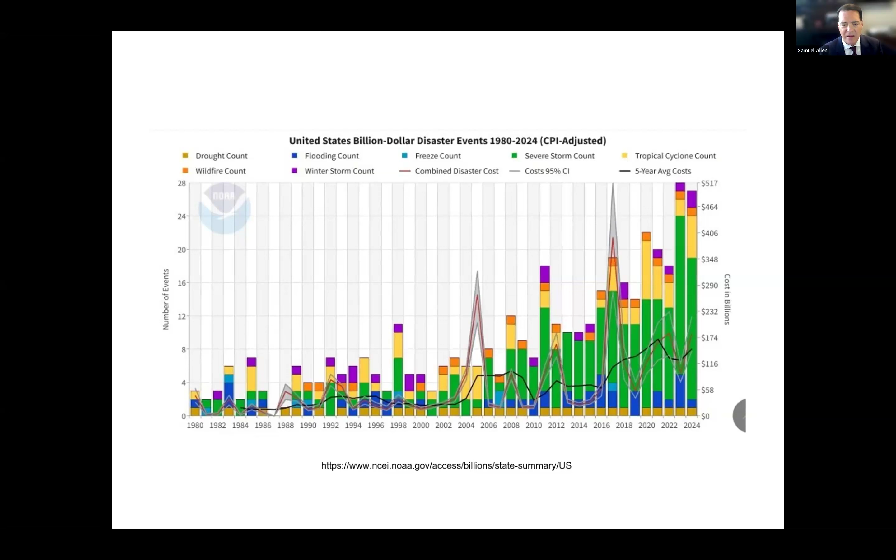What you're seeing here is a chart from the National Oceanic and Atmospheric Administration. It shows us the cost of recovery, adjusted for the Consumer Price Index. The cost is increasing because the frequency of natural emergencies is increasing, such as floods and fires, superstorms, droughts. Our weather is changing, and its subsequent stress on our infrastructure is increasing.

This is happening while the global trend towards replacing fossil fuel cars with electric cars is intensifying our thirst for needed metals and driving a growing mining industry. Your cell phones, your cars, we're electrifying our energy sources, and this requires a lot of metals. Electric cars result in a heavier vehicle that our pavement structures, as they exist today, were never really designed for, challenging our transportation infrastructure.

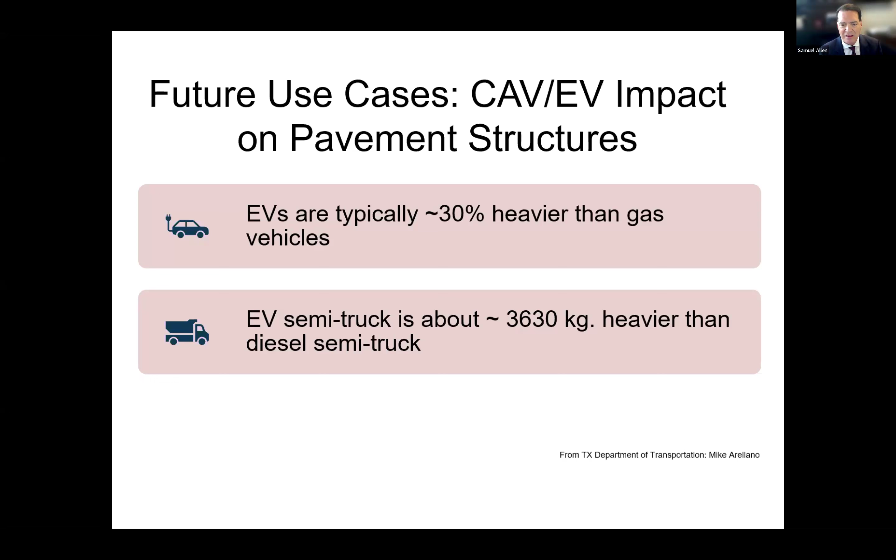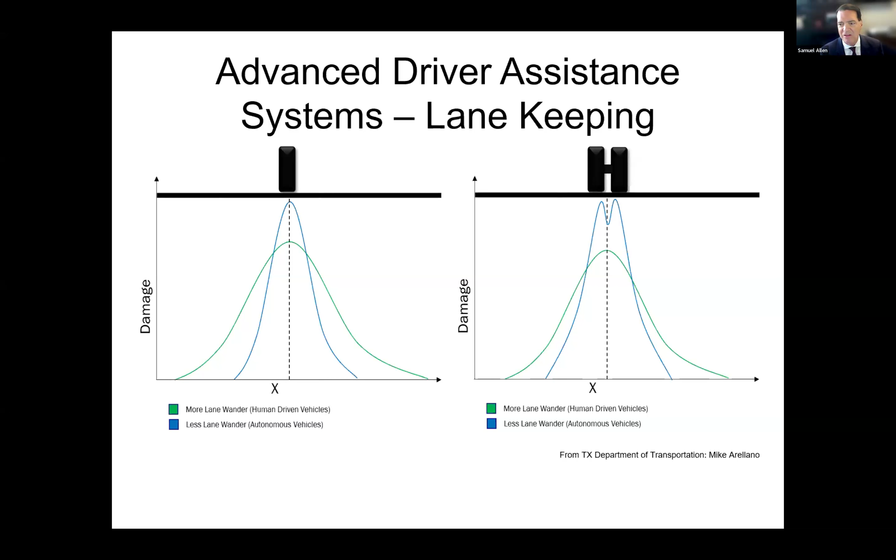I don't know about your town, but in my home here in Austin, Texas, there's been a significant increase in Waymo cars, the driverless cars. And according to Texas transportation officials, the next step in this linear process is to have automated transport lanes, with much less lane wander, called lane keeping. And this also increases localized stresses on road structures, roads that indeed were not really designed for this.

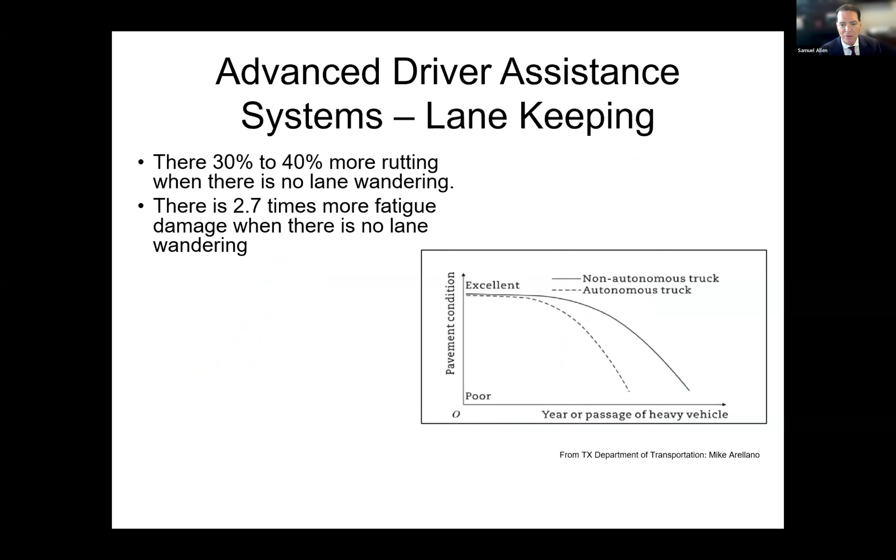So there's 30 to 40% more rutting associated with lane keeping and close to 3 times more fatigue failure or cracking. And cracking is not good, right? This leads to water intrusion and related degradation mechanisms. This is an environment of underfunded maintenance, as reported by TRIP. You see here the recent report card on United States infrastructure roads.

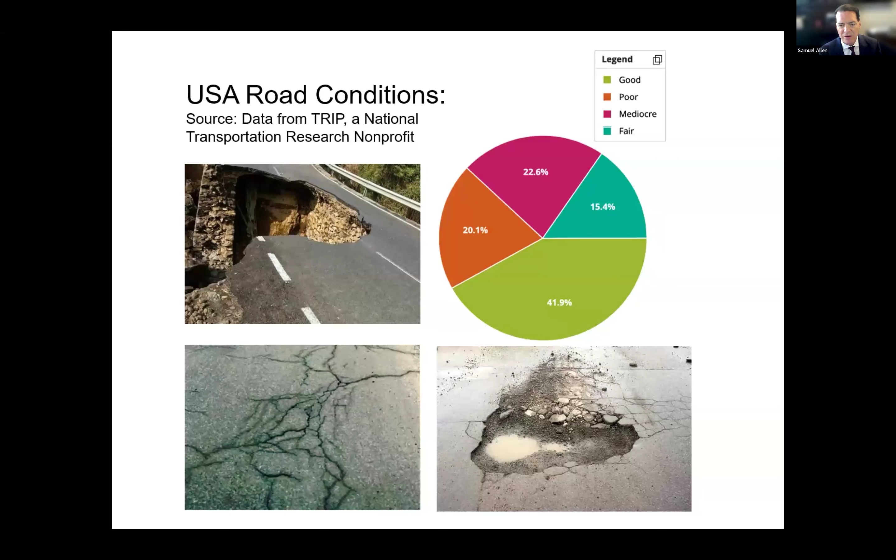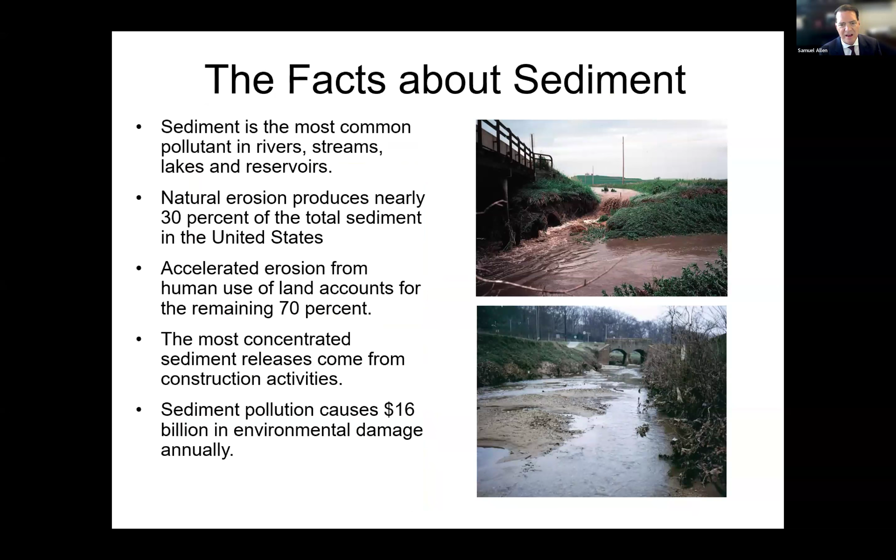I would also add that an application that's of very impressive scale is sediment pollution, and this is worldwide. This is a global issue. We, human activity, drive this pollution, and the damage caused is very expensive to our society, as you see here. The effect of erosion to waterways is also harmful, driven largely by warming water resources, the choking off of dissolved oxygen supply, the increased turbidity. These changes fundamentally challenge our ecosystems, including accelerated loss of wetlands.

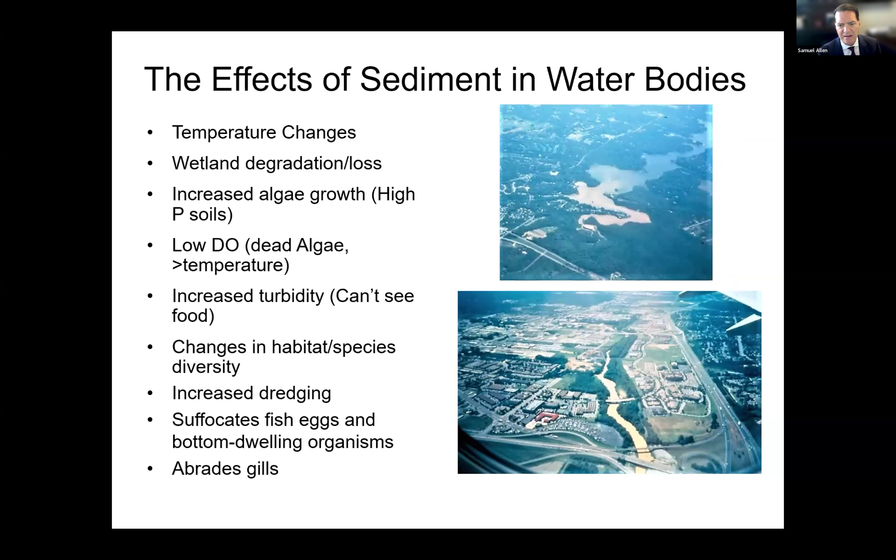So we need a different way forward. From an engineering perspective, this means an added design criteria. As my good friend Dr. Jorge Zornberg has expressed, most engineering students early in their collegiate career learn about materials and learn about the performance of those materials. They graduate, they go out into the commercial world, they quickly learn that economics governs decisions on firms, decisions on materials. But now we're starting to figure out that there's a very strong, urgent need for the requirements for sustainability and indeed resilience.

The United Nations, of course, most of you have seen this, has set the stage for humankind to target sustainability with these 17 goals, ranging from food security to an end of poverty, but also a response to climate change and the preservation of clean environments. But sustainability and resilience means different things to different people. There's often in design a push-pull relationship between economic concerns and equity, human equity or social justice, engineering efficiencies, and the lowest carbon footprint, right?

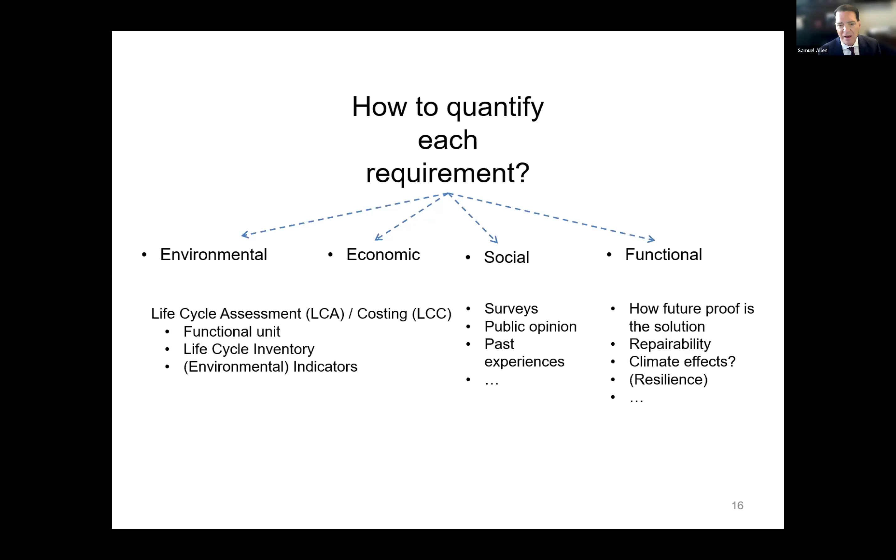Geotechnical and civil and environmental geologic engineers are starting to navigate these kinds of push-pull issues in their design. Indeed, a given structure, geotechnical structure, is burdened with requirements informed by or affected by multiple considerations: carbon counting, economic cost, public benefit, resilience or future proofing of a structure. Ivan Damians, the current chair of the IGS Technical Committee on Reinforcement, compared three wall designs: a gravity wall, a cantilever wall, a geosynthetic reinforced wall.

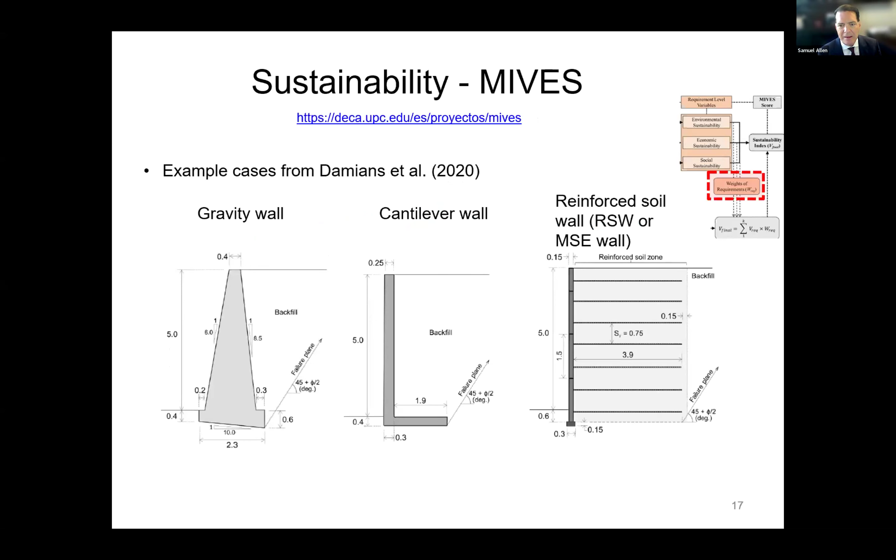He used MIVES, which is Spanish, out of Spain, an integrated value model for sustainable assessment, having a multi-criteria decision-making methodology for evaluating sustainability. And what's interesting about that is when he plugged in all the data and played with the weighting of all these sustainability related considerations, not just carbon counting, then the answer changed, right? The best option changed, showing that true sustainability assessments require a holistic consideration of several parameters.

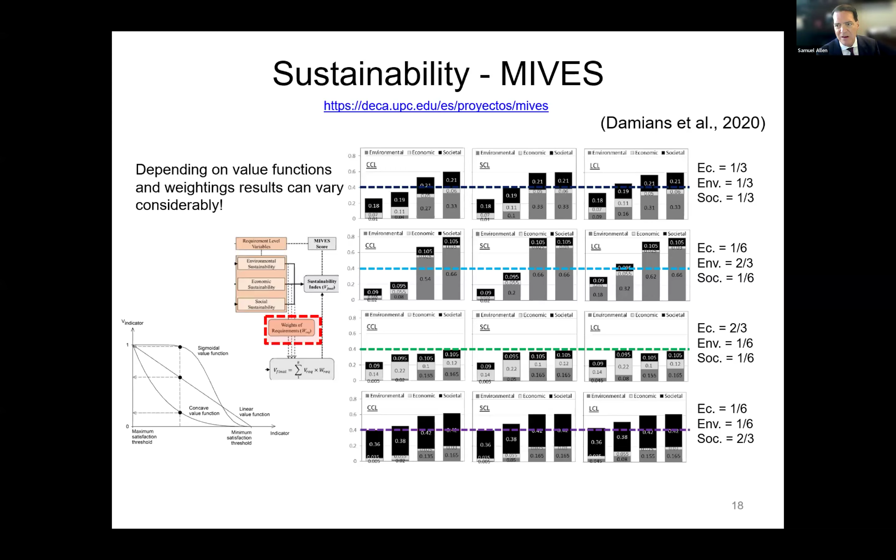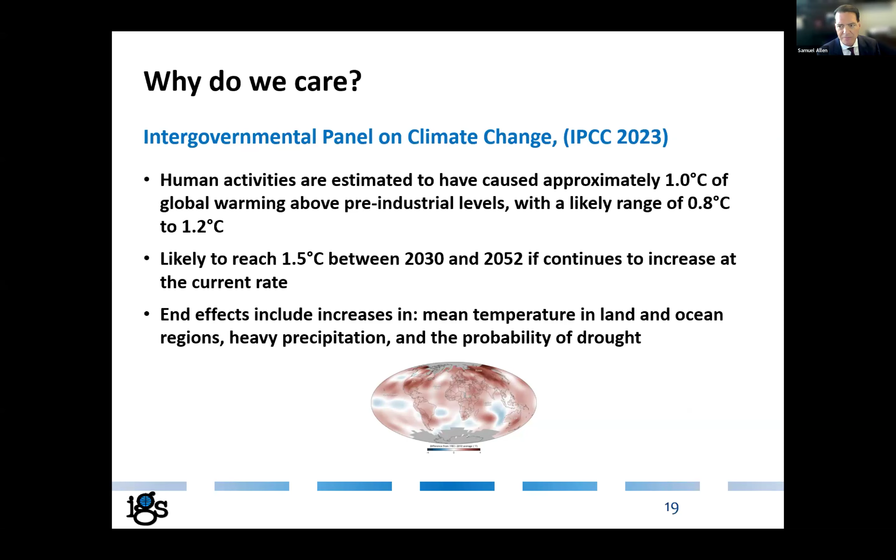So it's clear now that sustainable and resilient design are important as we experience warming of the atmosphere as well as water resources, the redefinition of extreme weather-related events to intense droughts, flood storms. And we're inviting infrastructure development industries to embrace more resilient and sustainable designs using more resilient and sustainable materials. And the other thing I'd point out is that it's in this planning and design phase of the development process that we have the greatest impact on making a change in our infrastructure development.

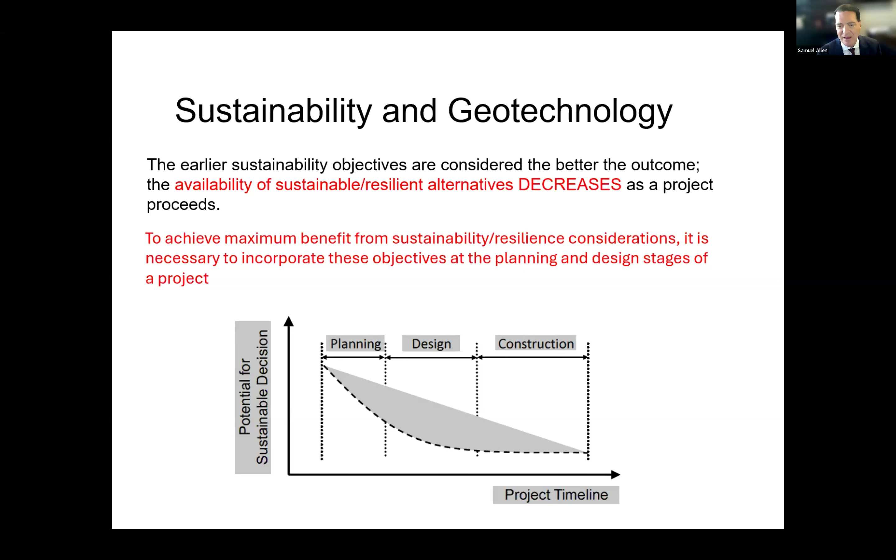For example, if I'm building a building foundation project, there can be a choice of foundation types at the planning stage, while the choice is limited to those materials during the design phase. And in the execution stage, the choice is very limited to just the equipment used to build my project. So it's really important that we maximize the benefit of these changes in our design to articulate sustainability, move towards sustainable and resilient considerations early in the planning and design phases.

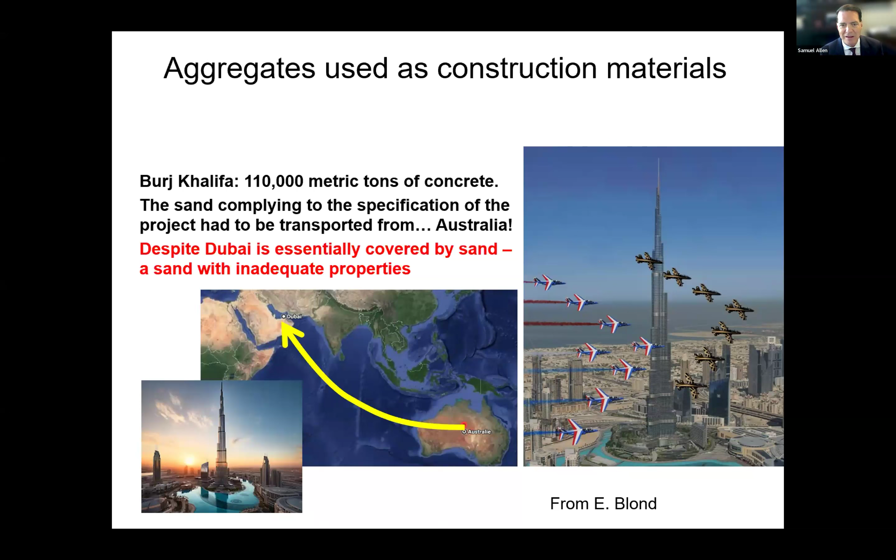I'd also add that, if we're thinking about design materials, construction materials, what about aggregates versus geosynthetics? Aggregates of adequate quality for construction are among the less renewable resources on Earth. Eric Blond, my good friend, pointed out that just in the last few years, this wonderful building in Dubai, this tall, record-setting building, the Burj Khalifa, 110,000 metric tons of concrete, but it needed a component with a very strong specification for the sand that was not available in a country covered with sand. And so all of this sand was transported and imported from Australia. So this is an issue, right?

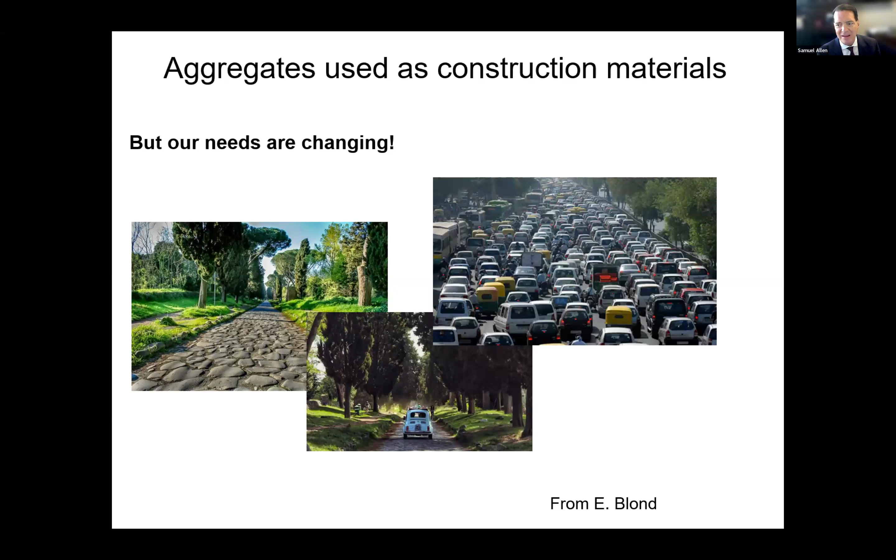Sand and gravel, they're very durable when they're not contaminated, certainly. Aggregates and sands are known commodities. We study them in school. We have designed with them for centuries, but indeed our needs are changing as we grow in population and in traffic. So again, in my own town of Austin, Texas, when I moved here to go to college in the early 80s, it's been nothing but a solid boom. This is Texas. Economy's on fire.

People are moving from all over the United States into the triangle that's defined by Dallas, Texas, San Antonio, and Houston. All those people bring their vehicles, and all of the infrastructure that we have is inevitably going to not be enough, right? And while our needs increase, the availability of aggregates, competent aggregates to build roadways, remains the same. It's not increasing.

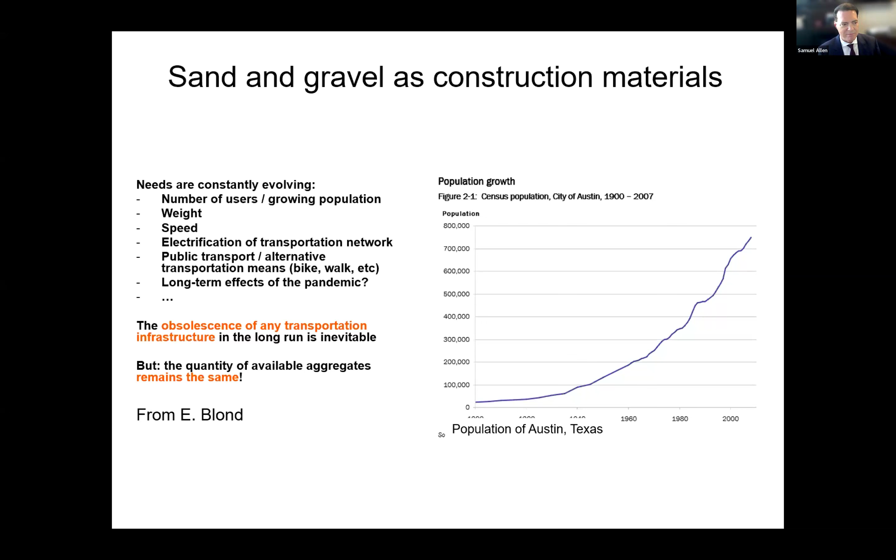So, see if I can move on here. Seem to be stuck. There we go. Okay, so

Let's talk a little bit about geosynthetics.

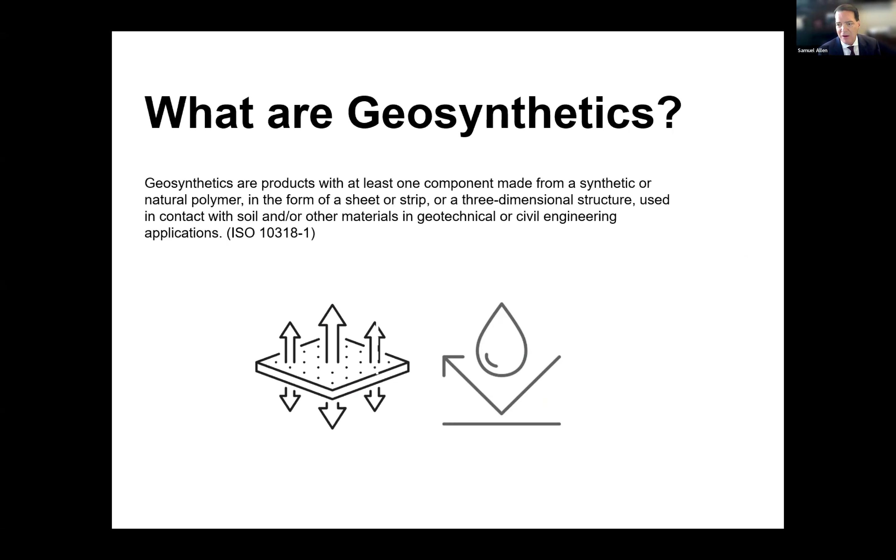For the not initiated, what we're talking about here is materials that are artificial products that are added to Earth to fulfill a function, right? In whichever function they're used, the geosynthetics will be either permeable or impermeable, allowing for or preventing the flow of liquid or gas in either direction.

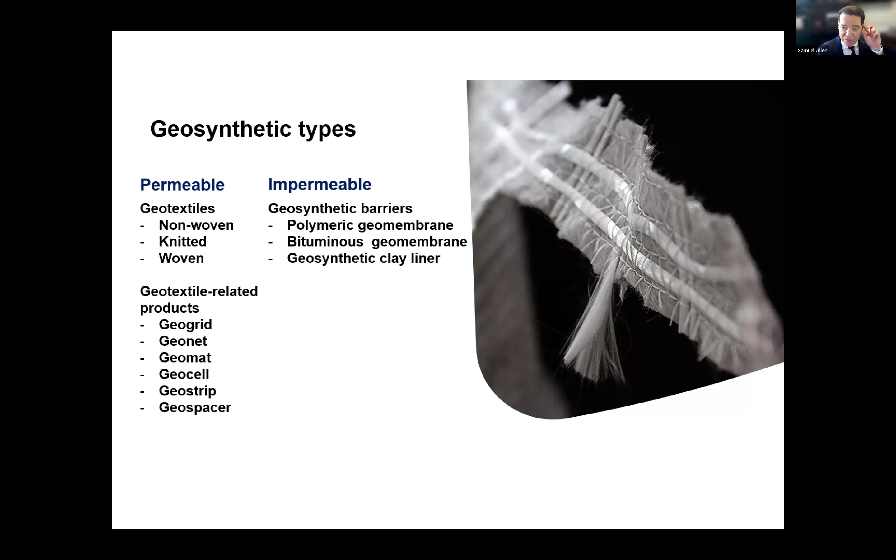In general, geosynthetics are in the form of textiles, and when they're in the form of textiles, they're permeable. They can be woven, as in the picture here, or non-woven or knitted. They're used with a range of related products listed here. They're really the workhorse of geosynthetics, with many, many different functions. Impermeable geosynthetics typically perform a barrier function and are often in the form of a membrane.

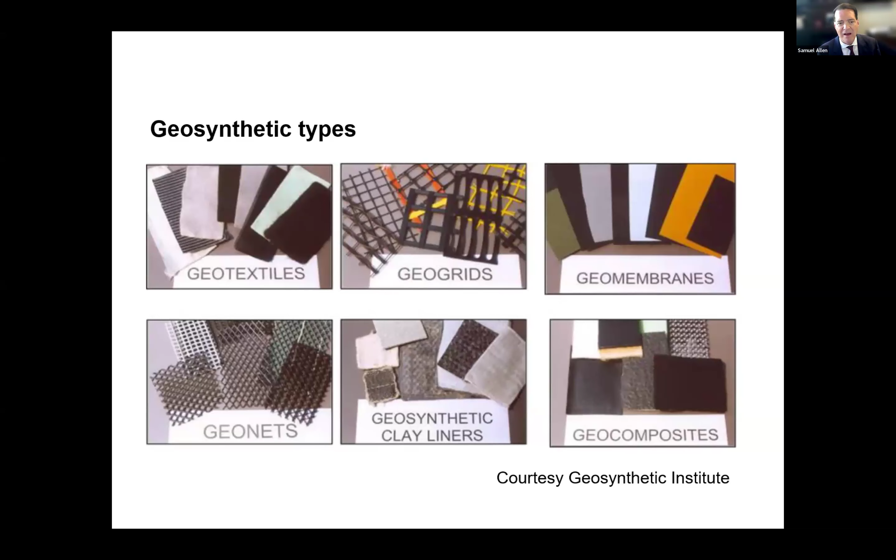Here you see some pictures of small samples of geosynthetics. Most of the main types of geosynthetics; what's probably not shown here is geofoam, polystyrene blocks and drainage noodles. But you see here geotextiles, geogrids for reinforcement, stabilization, geomembrane barriers, geosynthetic clay liner barriers, geonets, and composites, of course, when two geosynthetics are joined together.

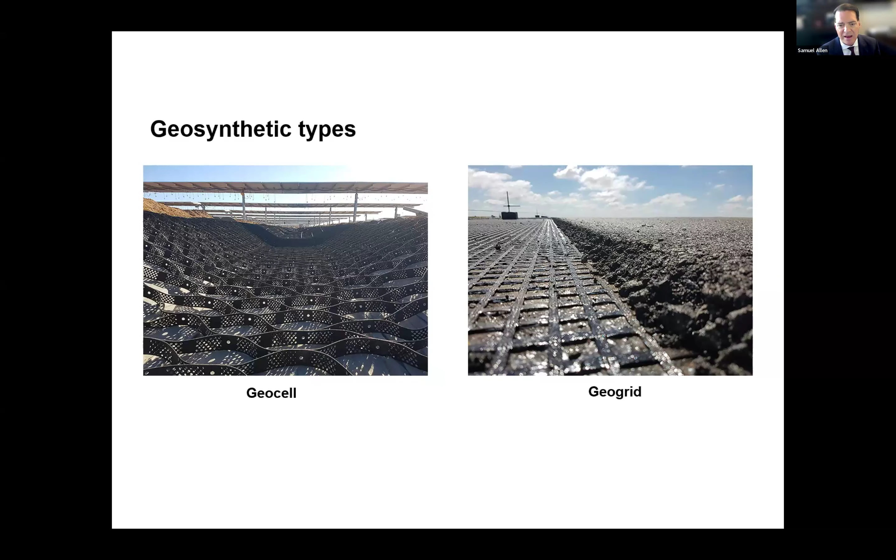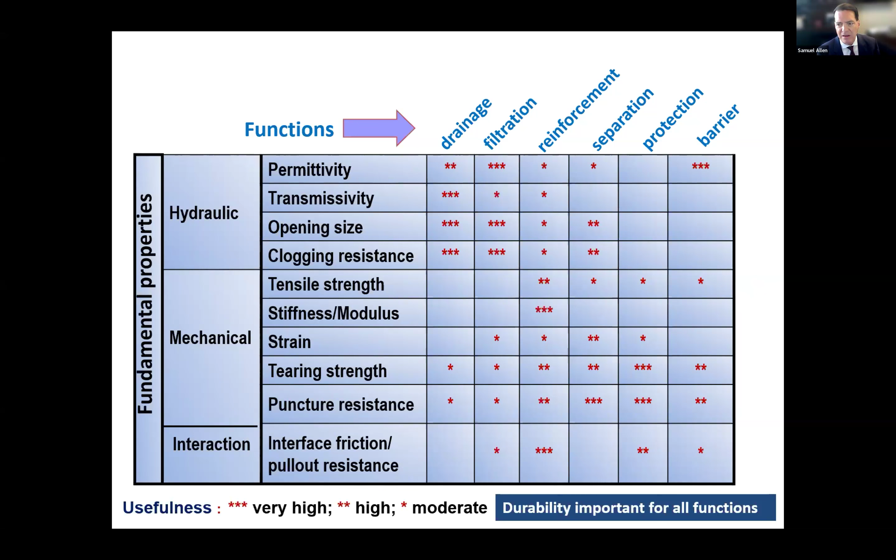I'll also add that as manufactured products, they differ from soils and aggregates in that they are highly controlled, produced under maximized manufacturing conditions, highly engineered formulations. They're characterized by a high degree of consistency, serving a more stabilized construction, more certified construction, if you will.

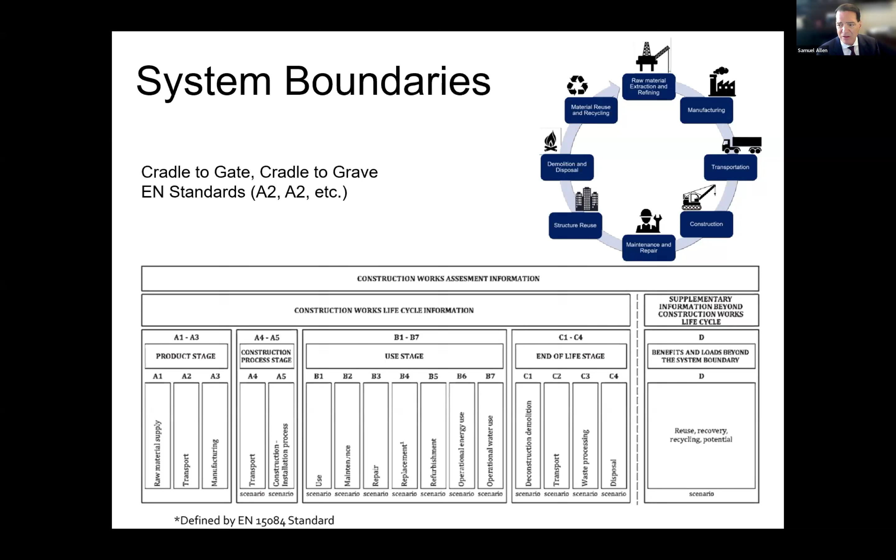You see here a table with columns assigned to various stages of construction work, from raw material production to manufacturing to shipping to installation. We see end of life, the full life cycle of this product. Any product for that matter.

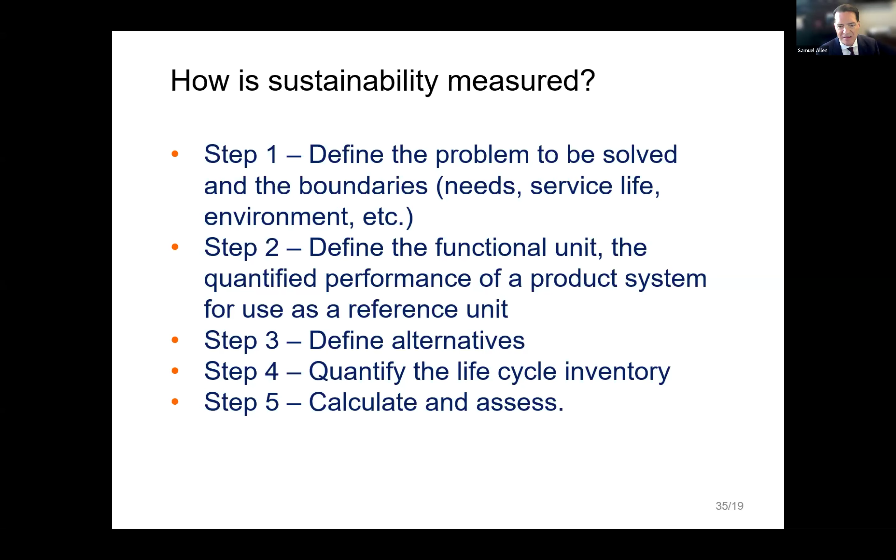So here, a functional unit is that little unit that I'm evaluating, comparing different design approaches with. A functional unit is a component or a service with a clearly defined role within a larger system. So it represents a quantified performance of that system, and the definition depends on the context of the life cycle assessment. It is a reference unit for comparing products by their function, right? We need enough detail with a functional unit to provide a valid comparison with other material alternatives.

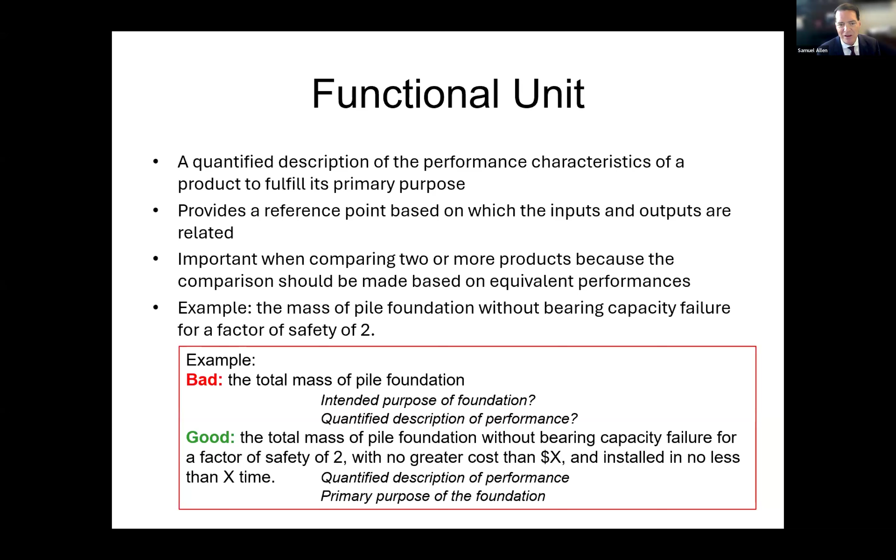Like you see here, I could plan on a pile foundation without a bearing capacity failure for a factor of safety of 2, no greater cost than X USD, and installed in no less than X time, right? So now I can start looking at alternatives to provide that function, that service in my design.

Now, note that the language of carbon counting is always through the use of carbon equivalents. What is this? The CO2 equivalent is a unit that standardizes the climate impact of different greenhouse gases by comparing their warming potential to that of carbon dioxide, sort of the common denominator.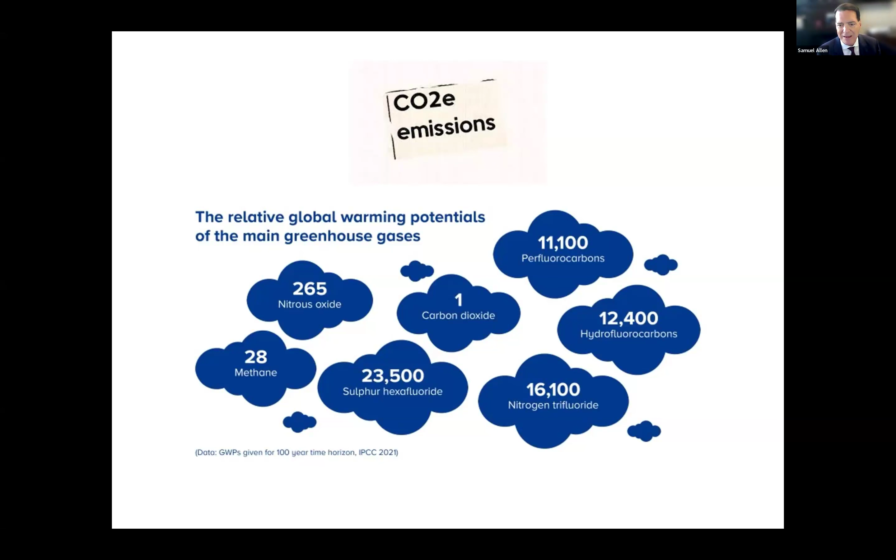To calculate it, you multiply the mass of the specific greenhouse gas by its global warming potential relative to CO2. And this provides a single comparable metric for the total climate impact of all greenhouse gas emissions. Very important tool. So let's just play with this.

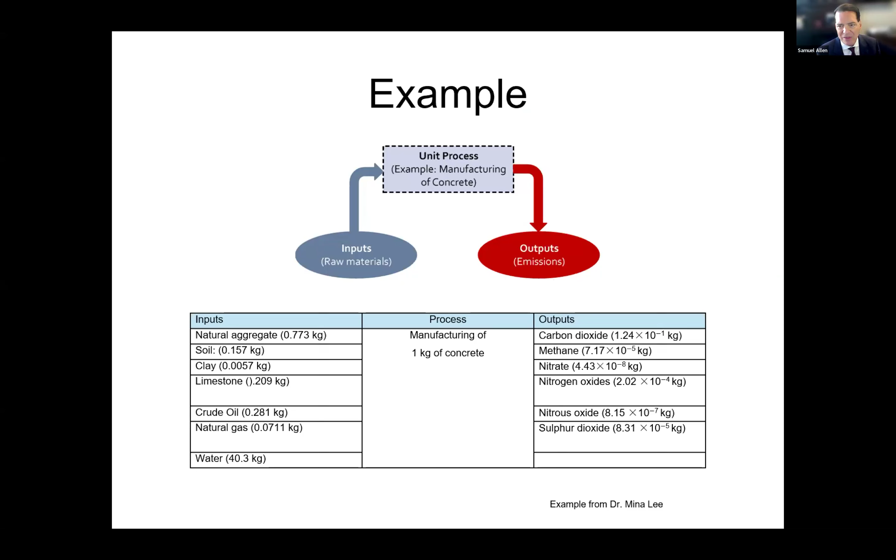Let's take 1 kilogram of concrete, and I know all the components of my concrete, and consider the inputs and then the resulting emission outputs, right? And if I get that, then I can multiply the emission factor in a carbon equivalent unit, a CO2e unit, times the mass of the concrete shown here for carbon dioxide. So that 1200 kilograms will generate 149 kilograms of CO2.

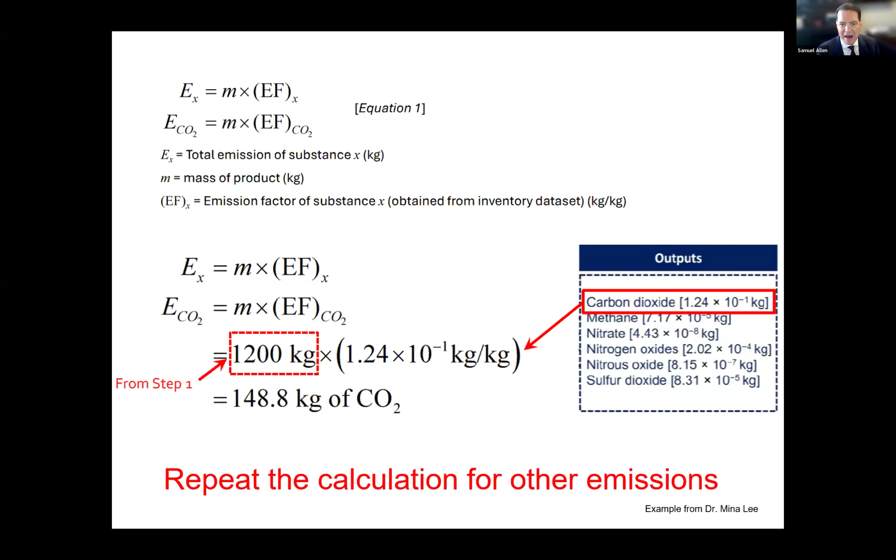And then I would repeat that calculation for other emissions. So this is how I compare these different materials. But that's material carbon counting. What about the shipping of that material to a site? This is a function of the type of road and the distance I'm traveling. The paved road is not the same as the unpaved road, right? So these go into our calculations.

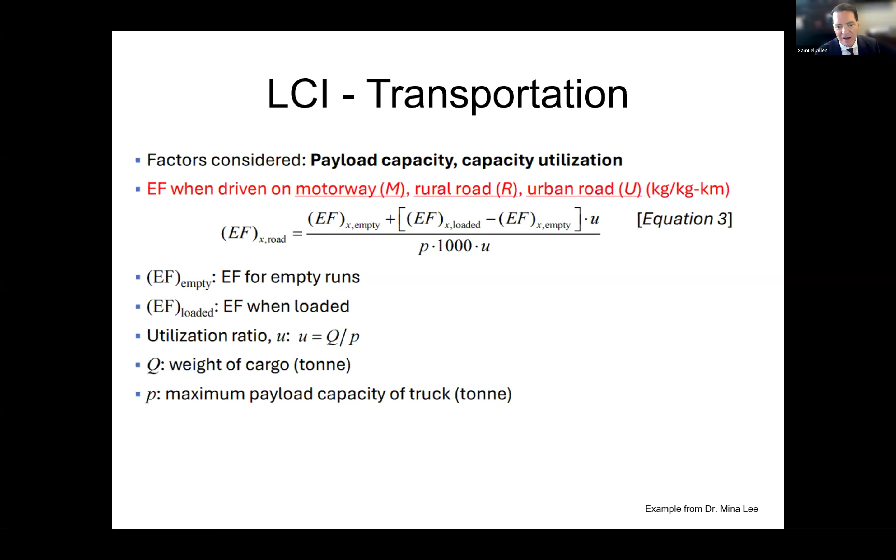Also considered is how full my delivery truck is, its fuel efficiency, its weight, a lightweight truck or a heavy truck. Now, a lot of this carbon counting and shipping data can come from what we call environmental product declarations. These are produced by equipment manufacturers, material manufacturers, geosynthetic manufacturers, and then they're published by these same companies. So a lot of this information comes from them.

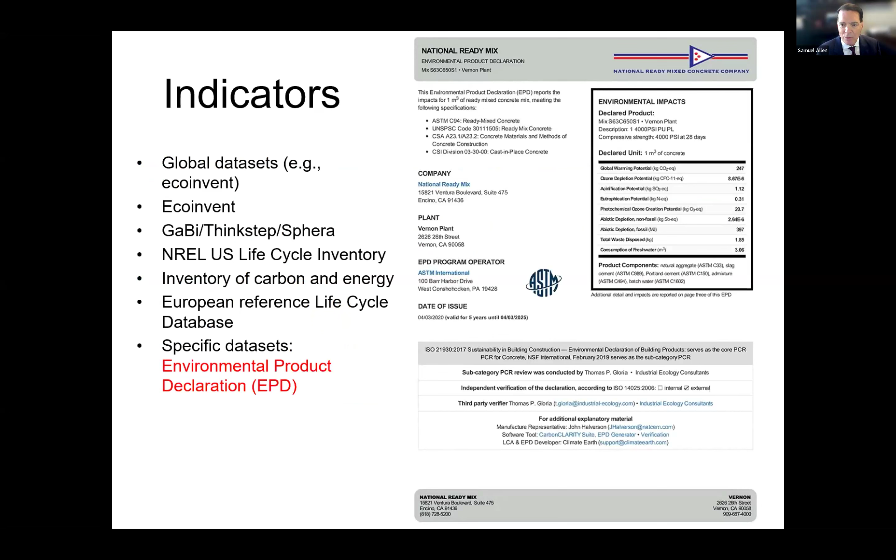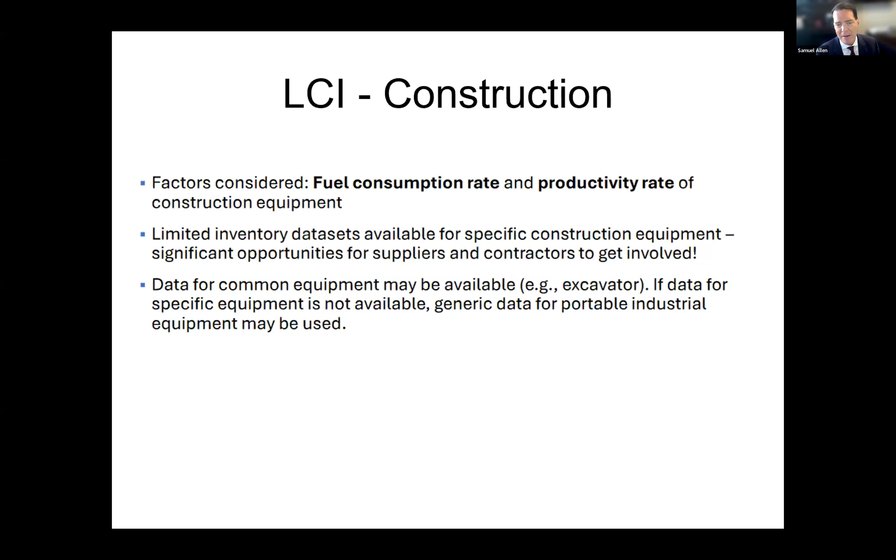What we're still missing in our industry is the life cycle inventory associated with construction. It's leaning into equipment published EPDs, but there's so much active here. The carbon footprint is related to fuel consumption and efficiency of installation and construction. That efficiency we need from some of our geosynthetic installers, and really a lot of our contracting community. Factored in are the power of the engine, loading factors, fuel density and efficiencies. All of these things go into considering the carbon footprint of construction.

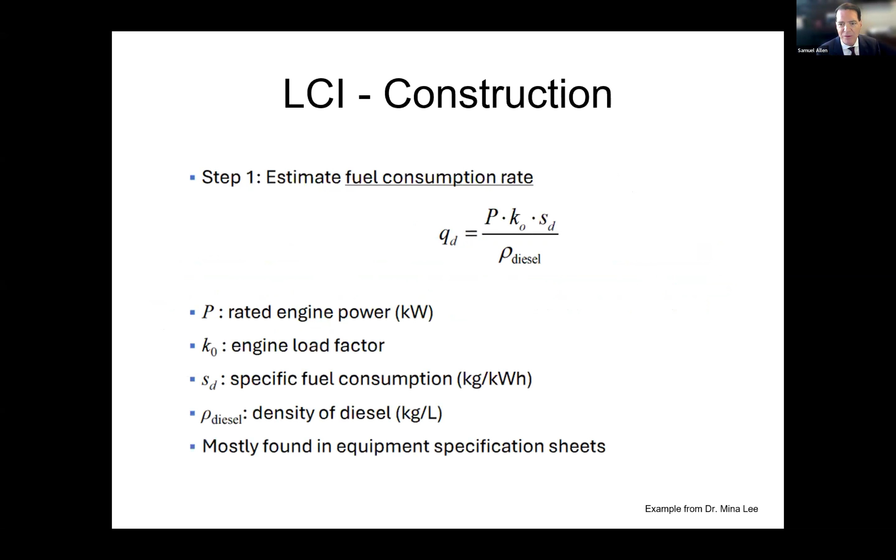And then we consider the operation time, which depends on workloads and productivity rates; something called the bucket fill capacity factor comes into play. How many trips do I have to make between the stockpile of material and the compacted fill location or the installation location? This is all to point out that these are not just numbers, but significant calculations that impact the environmental carbon footprint application.

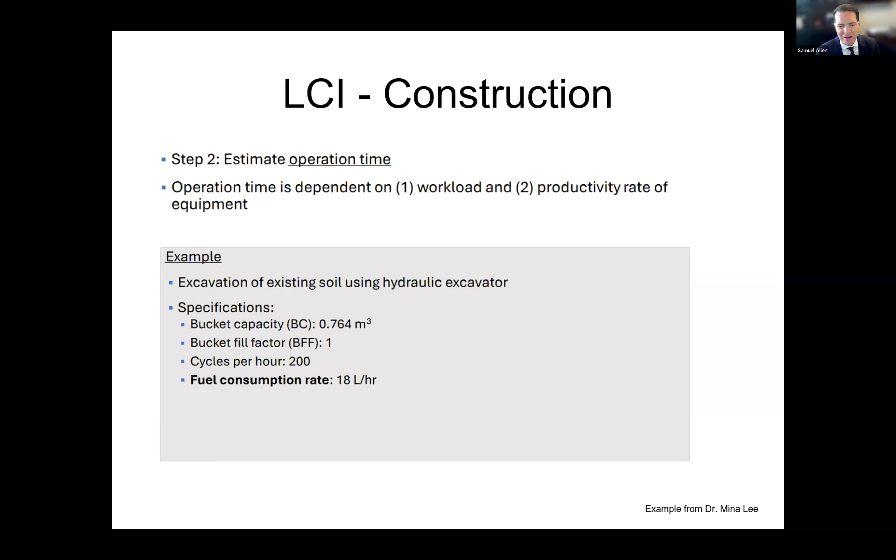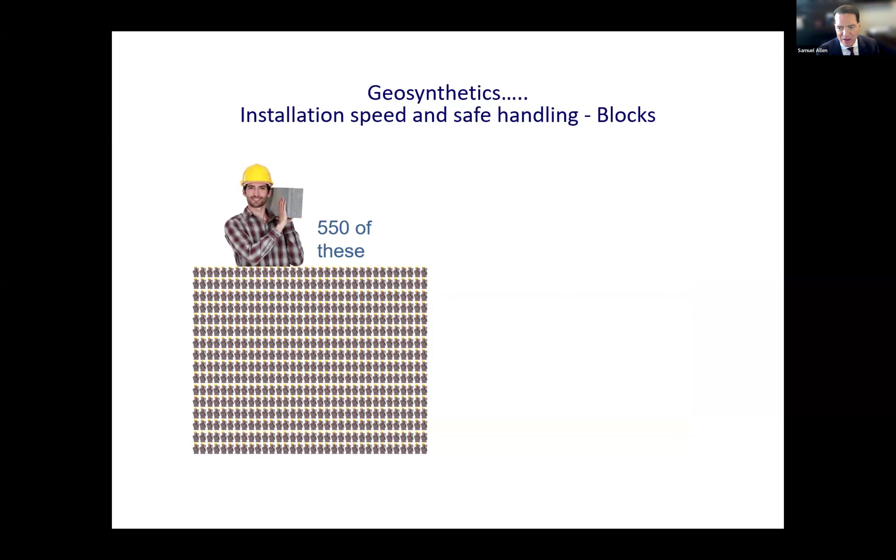And why is the geosynthetics industry so keenly aware of this? Because the use of geosynthetics is a significant solution to lowering the carbon footprint of transportation, shipping, and installation. Not just an economic benefit, but a sustainability benefit as well. So when we can replace a lot of these drainage blocks with a roll of geocomposite drain, that's a big contribution.

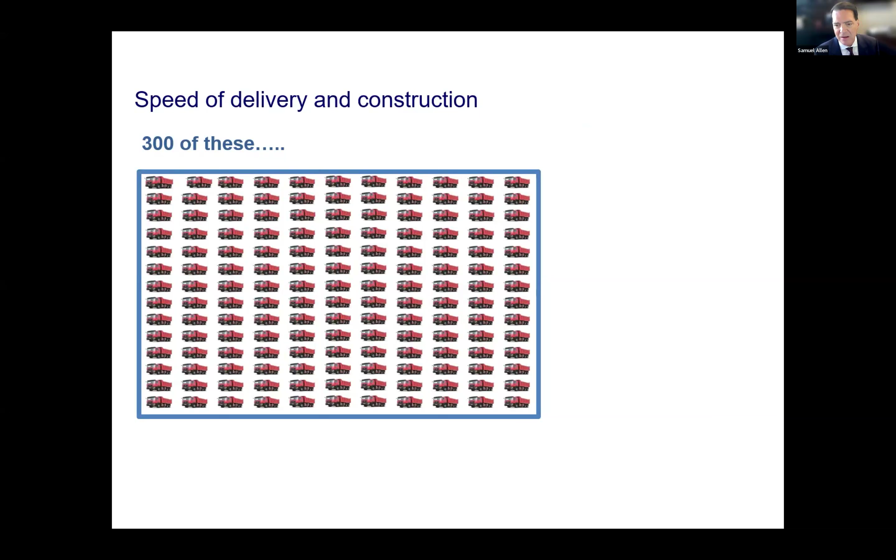When we eliminate these significant numbers of transports, ships or trucks at lighter loads, then we're achieving numerous sustainability benefits, including less tire wear, less fuel used, less time invested, all with a lower carbon footprint construction material. So again, I show you this to draw back the curtain on the process and calculations of sustainability. Meanwhile, there are many online platforms and databases to assist you in finding carbon footprints associated with construction materials.

The challenge with many of these platforms, though, is that most of them do not include geosynthetics information. And for that reason, the International Geosynthetics Society partnered with One-Click Life Cycle Analysis, or One-Click LCA. What we did was bring geosynthetic materials and their applications in different components, different platforms, to be included on their program for comparing different construction materials.

OneClick spends most of its time going around the planet harvesting these environmental product declarations and their associated material carbon scores. They are a very important layer in sustainability education and resource development associated with sustainability and resilience. They provide an application template that was developed by our team at the IGS. They assist geosynthetic manufacturers with EPD development and publishing. They are carbon counting experts at LCA.

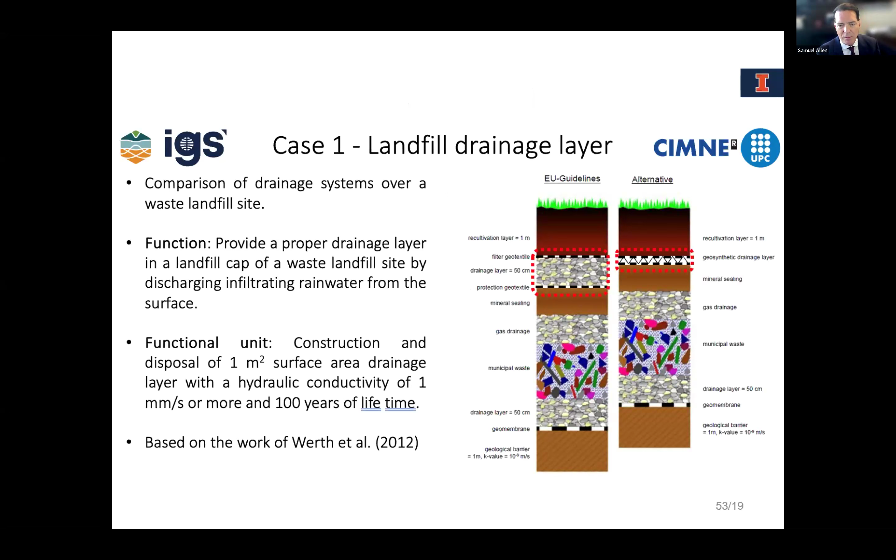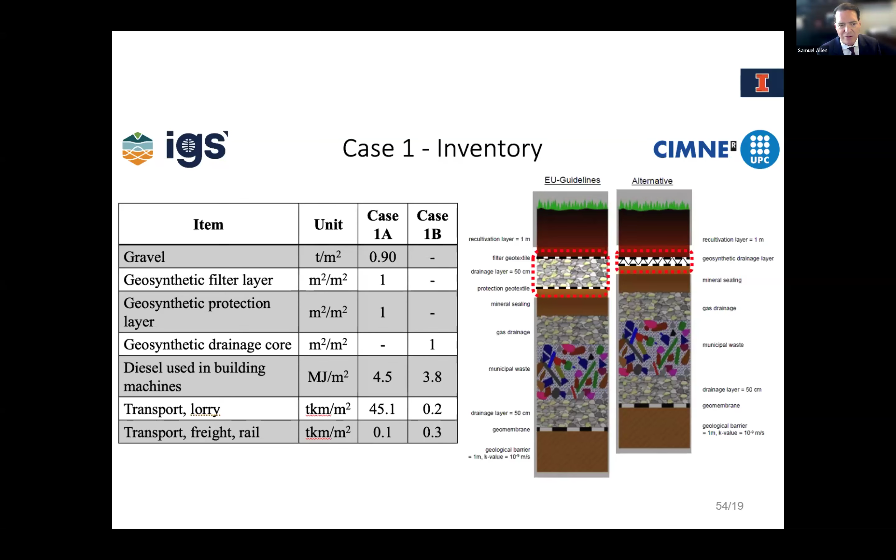So let's look at a couple of comparisons here. We're comparing a functional unit of 1 square meter of a landfill cap drainage layer, built with a drainage aggregate or with a geocomposite drain, for a service life of 100 years. Note that even the aggregate drain has geosynthetic filter and protection geotextiles as part of the design. So we can plug in this information. Calculations are seen here, including considerations of transport: lorry or truck, or freight rail, depending on the material.

We're integrating here with global databases on the OneClick platform for quickly adding public EPD information and generic data. And what we come out with is a visualization of a lower carbon footprint, right? Results based on the stages of the life cycle analysis that we saw, right? Are we looking at the raw materials or the shipping, the production of those materials, the shipping of those materials, the final waste disposal or recycling of those materials?

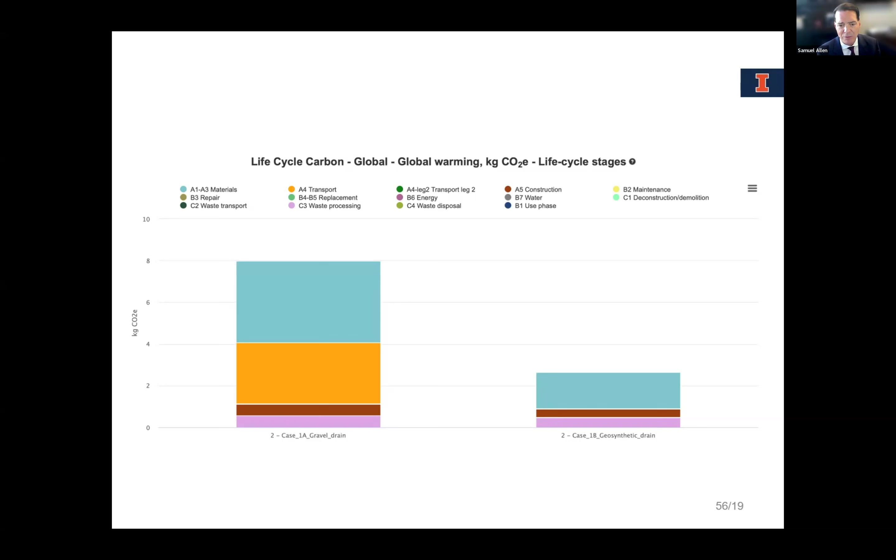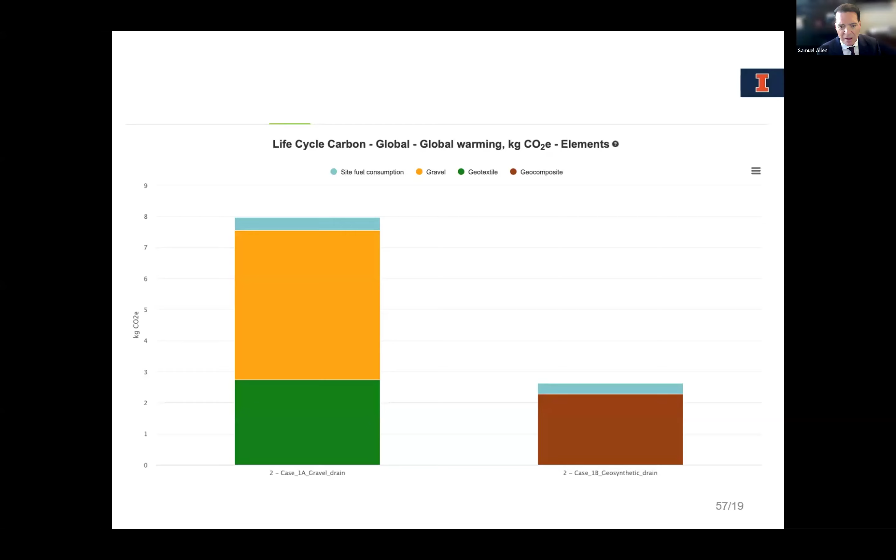We have a lot of these applications on the OneClick platform, from landfill linings to landfill drainage courses, canals. We're looking at road stabilization applications, steep slopes, retaining walls, just all kinds of applications for an engineer user.

Now, the EAGM, this is the European Association of Geosynthetic Manufacturers, conducted life cycle analyses for many different applications, including geosynthetics versus traditional solutions, if you will, non-geosynthetic designs. They considered 8 impact categories, and they found filtration functions achieved around a 90% reduction in carbon footprint and over 80% savings in primary energy demand.

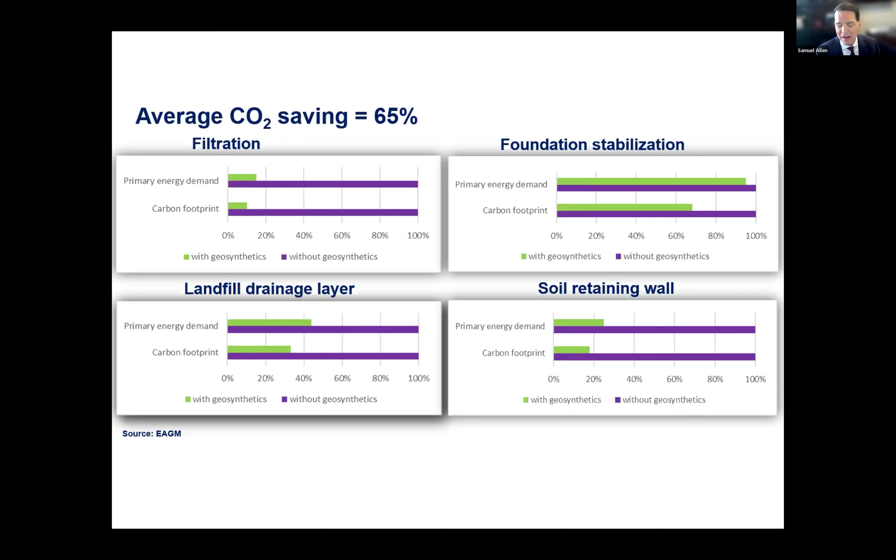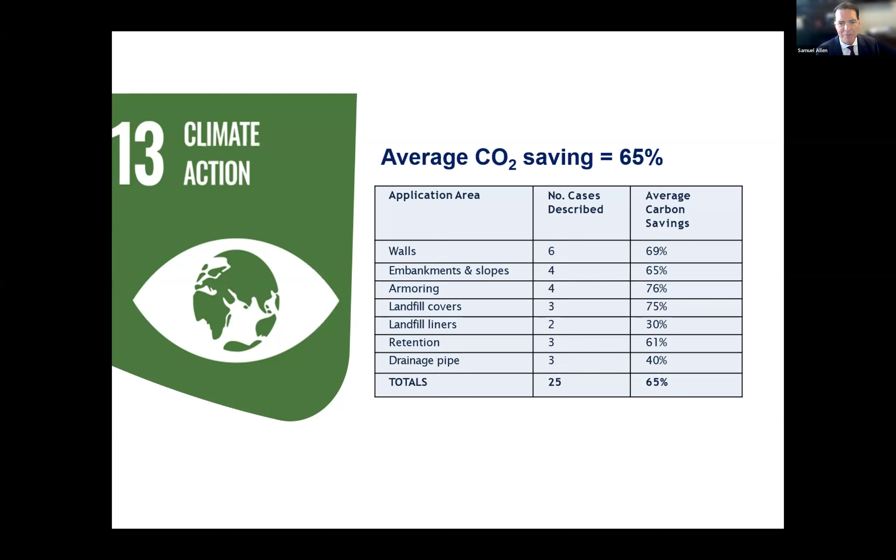Retaining wall savings were over 80%. Landfill drainage carbon savings were around 65%. Foundation stabilization was over 30%. Really impactful advantages, right? A survey of 25 applications demonstrated an overall average of a 65% reduction in carbon footprint using geosynthetics, right? Very, very impressive in the context of using geosynthetics as a product.

Okay, well, now let's take a look. That's a big, long preamble, right? And a little bit of information about geosynthetics. But let's take a look at these applications, right? Let's look at a few common applications that these are used for. And I'll start a little bit with erosion control.

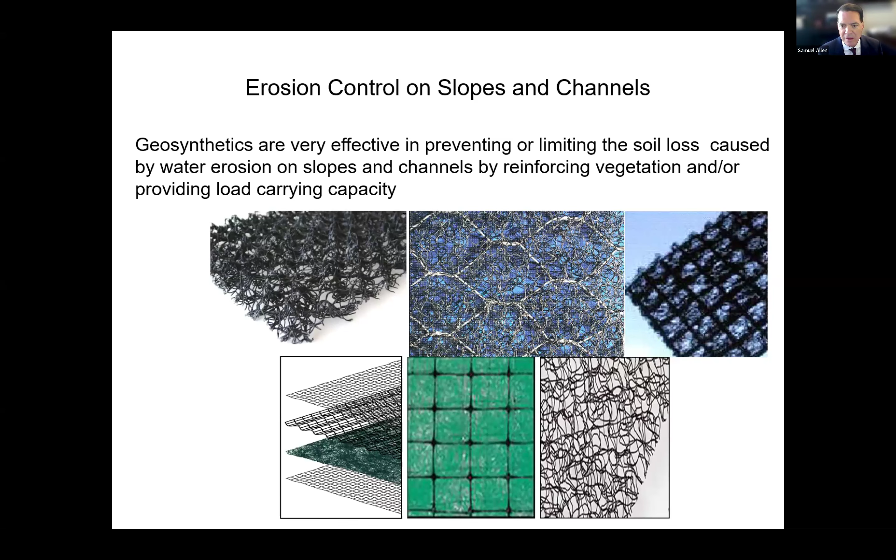Erosion control, these are synthetic materials, right? And they can include very high strength load-bearing components, multiple layers, sometimes including a geogrid or even metallic components, as you see in a picture here, to assume load on steep slopes. And these products are providing surface erosion control as well as slope stability, all while lending their porosity to vegetation. The best erosion control is vegetation, right?

But vegetation alone can be enhanced by these geosynthetics because the vegetation root structures can become intimately entwined with the porous structure as reinforcement to their root structure. The root structure is now not just within a soil matrix, but an established anchored three-dimensional structure. And this is very important. And this, of course, provides us with a lot more benefits for longer term healthy vegetation stands.

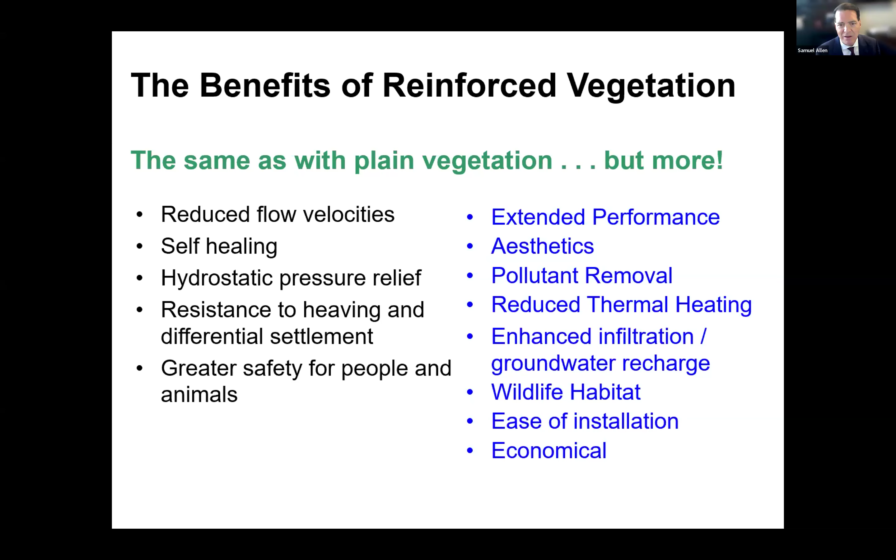Also important is the benefit of aesthetics, right? Many countries design solely for green slopes and walls. Their weather promotes that vegetation growth, that vegetation health, as long as the vegetation is strong and reinforced, if you will. Other benefits include reduced thermal absorption, hydrostatic pressure relief, pore water pressure relief, and of course, reduced flow velocities. So really nice application, very strong application of geosynthetics.

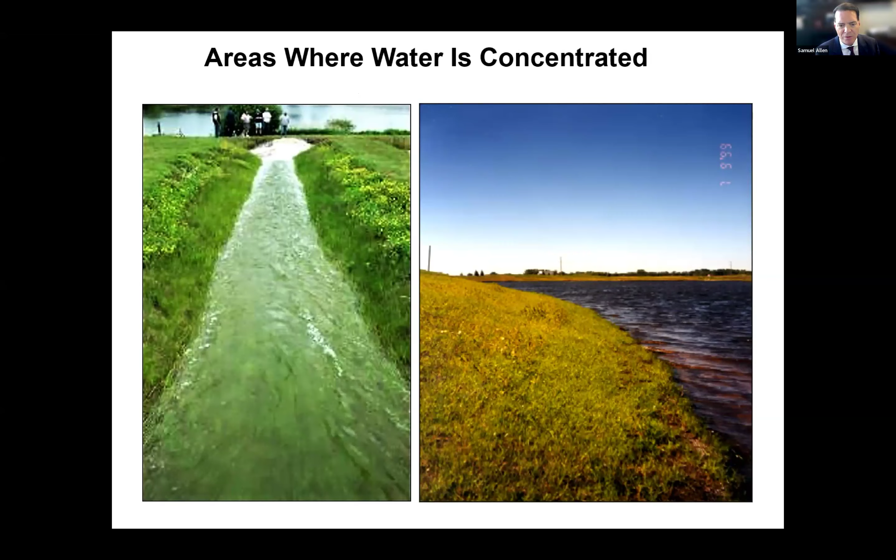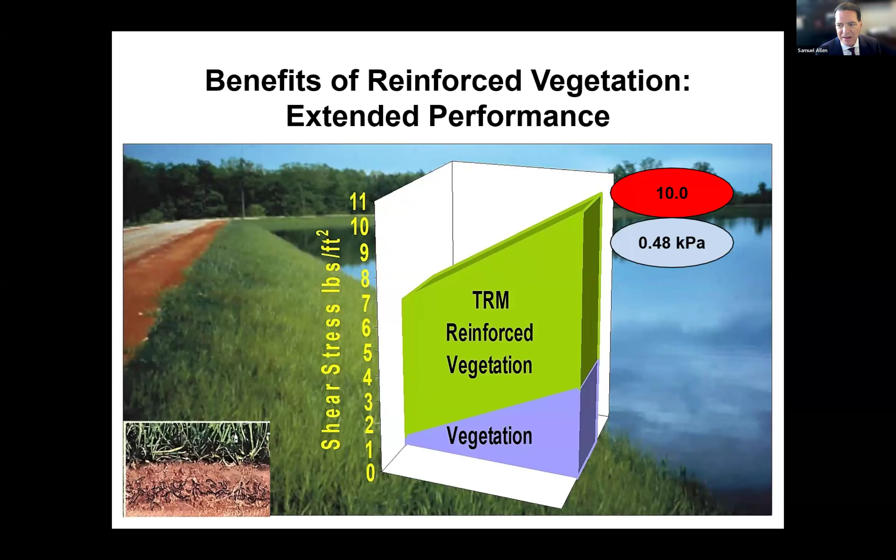These turf reinforcement mats assist where concentrations of hydraulic flow are very high, right? And flow velocities are very high, including shoreline slopes that undergo constant erosive forces. So very important application. Reinforced vegetation, again, enables design for additional hydraulic stress. So the reinforced root structure prevents the dislodgement of root structures in vegetation, keeping their reinforced slopes intact.

Scour is another big issue in infrastructure and hydraulic infrastructure, and this occurs when there's high velocity, fast moving water around these bridges, right? The water removes sediment from around the bridge column foundation, leaving behind scour holes. And these holes in turn can seriously compromise the stability of the column's integrity. So what do we think about that?

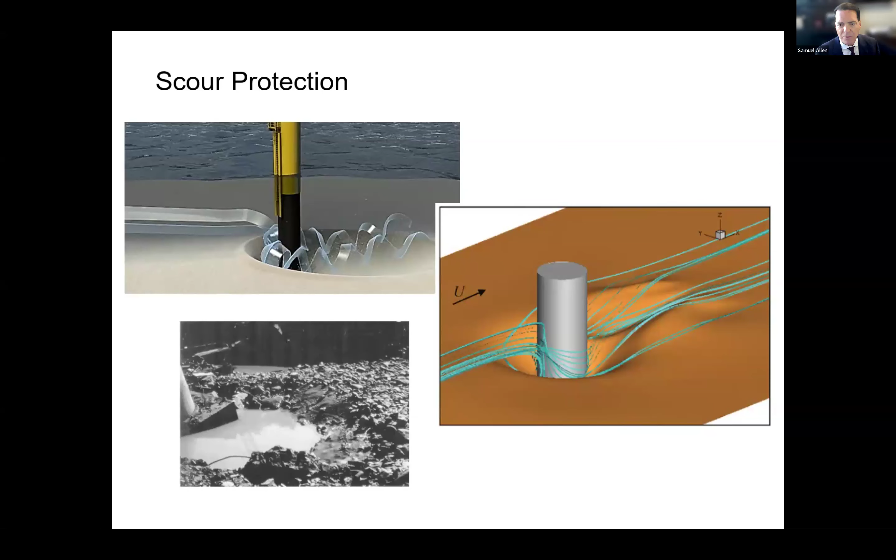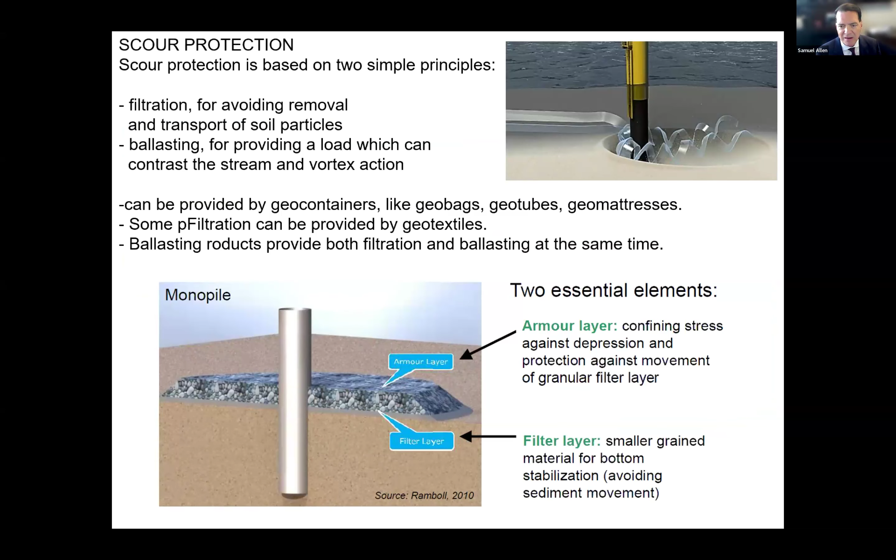The geosynthetic response here consists of two very important components. First, isolating a support system with an appropriately designed geotextile filter suitable for dynamic hydraulic stresses, as well as an armor layer working to stabilize the column and prevent adjacent erosion or scour erosion.

Scour protection of columns and support piles with geomats and geobags filled with on-site soil is very common and adds resiliency to the column and a lower carbon footprint, as I can use local soils, indigenous soils, to fill these bags.

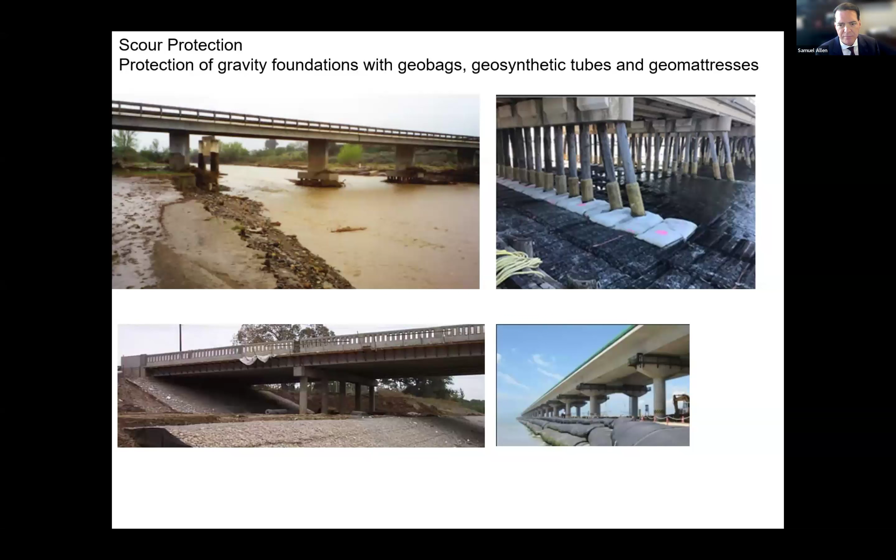Let me turn now to a novel use for barrier geosynthetics, such as geomembranes, turning now to mining applications. A novel use of these materials, not just for the very important application of environmental protection, right? Preventing contaminated pregnant solutions, the result of leaching, from going to a water table, from contaminating that water table, but also as these covers that prevent rainwater dilution of the digestion process while elevating the reaction temperature of these digestion processes for increased yields of metals.

Now, in this environmental application, of course, I need to point out that in this highly regulated application, regulated here in the U.S. by the U.S. EPA and all over the world by many different environmental authorities, landfills or waste containment, both municipal solid waste and hazardous waste, have represented a significant user of geosynthetics, including baseliner systems, as well as covers when landfills are closed. So the barrier function, the reinforcement function, steepened slopes means more fill available, covers, erosion control, drainage pipes, all kinds of different geosynthetics included in this very important application.

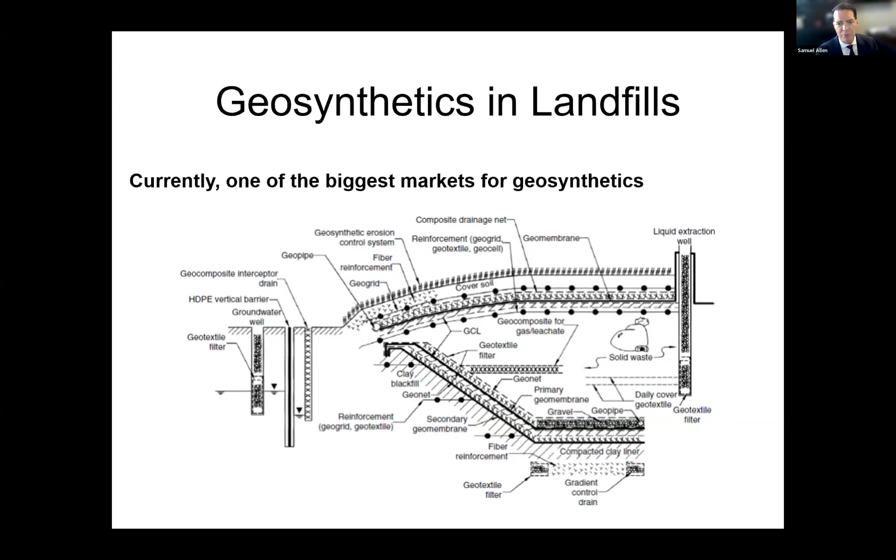In 2002, Dr. David Daniel, Dr. Bob Koerner, with Rudy Bonaparte at Geosyntec Consultants, received a grant from the US EPA to grade the performance of landfills, right? How are we doing constructing our waste containment infrastructure, measuring the leakage rates from geomembranes alone to clay and geomembrane composites to composite lining systems with a geomembrane and a geosynthetic clay liner. And they saw them through the initial filling period with waste, subsequent filling material, and then after final cover. What grade do we have in protecting that water table by measuring the leakage rate?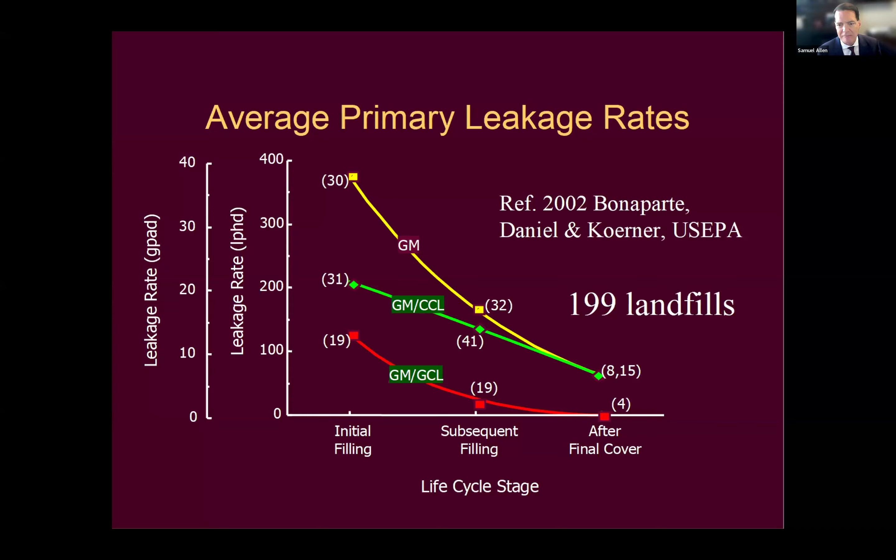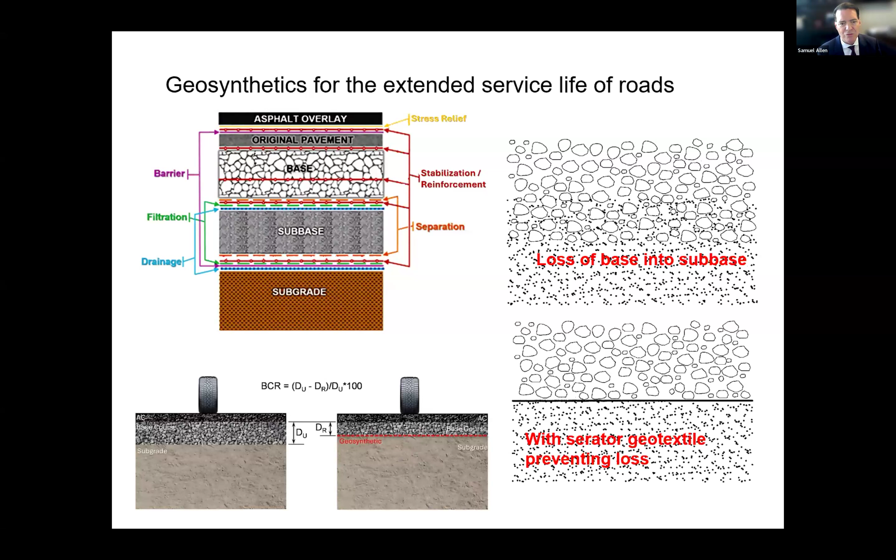So in roads, the use of geosynthetics solves many problems, such as frost heave, wetting and drying related displacements, the mechanism quite often for road degradation, the displacement of those aggregate layers beneath the pavement, the use of imperfect or non-desirable fills. Geosynthetics can help with that, as previously discussed. Increased traffic loads, right? Increased surcharge loads as a function of electric vehicles. They can also reduce the amount and expense of structural fill that you see here while preserving the integrity of the layers, eliminating degradation through mixing. So many contributions of geosynthetics to road infrastructure.

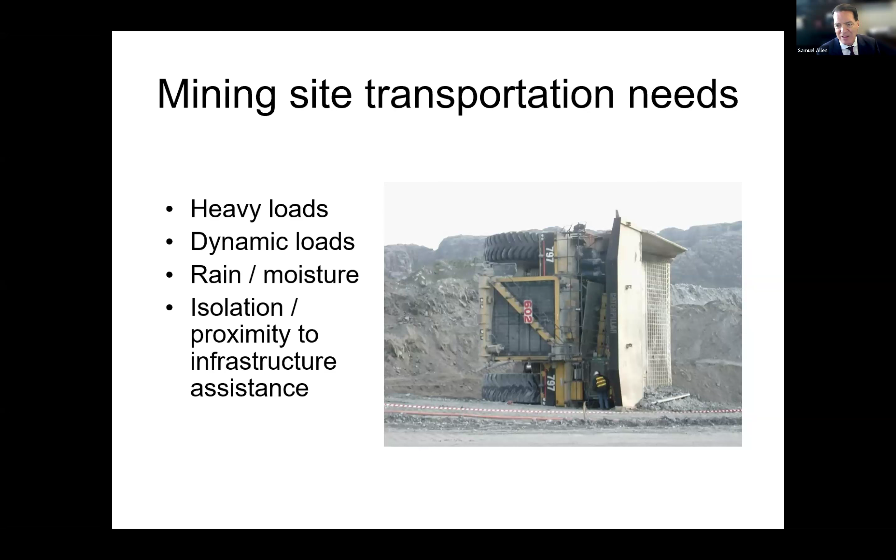I'll go back to mining, right? Mining haul roads represent a dynamic case history, if you will, with heavy and dynamic loads and safety considerations. Very challenging. This is a little case history. This is a Brazilian diamond mine with a problematic haul road. This is their original road design, resulting in problematic slowdowns when rain occurred. Over 2 meters here of designed road structure, right? 400 tons, 650, 800 trips per day. This is a big problem for them.

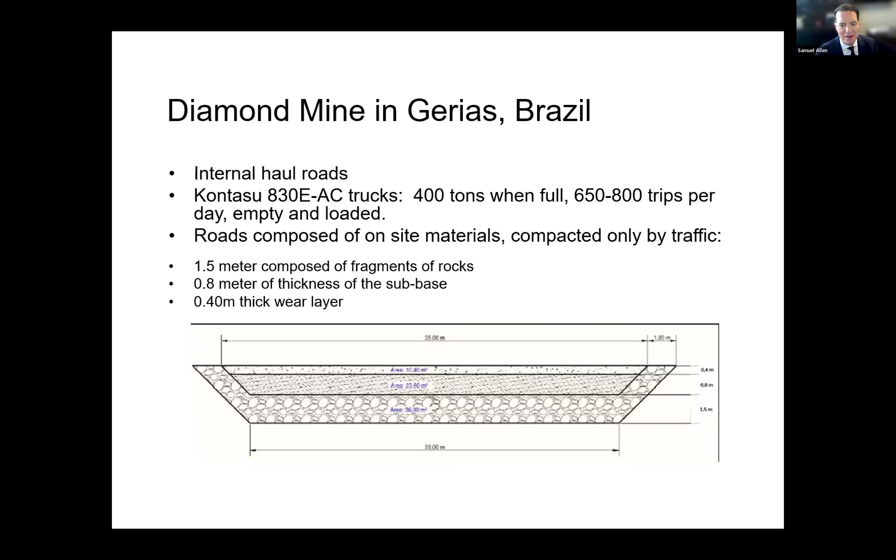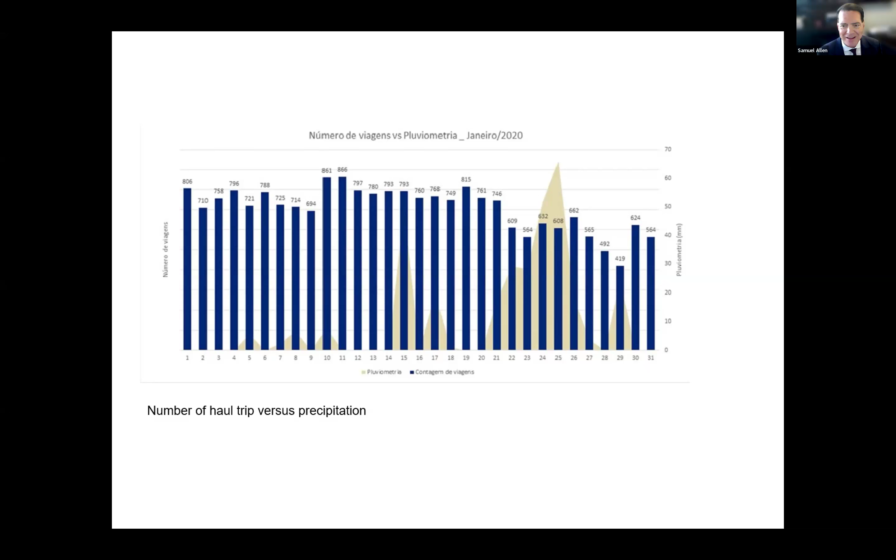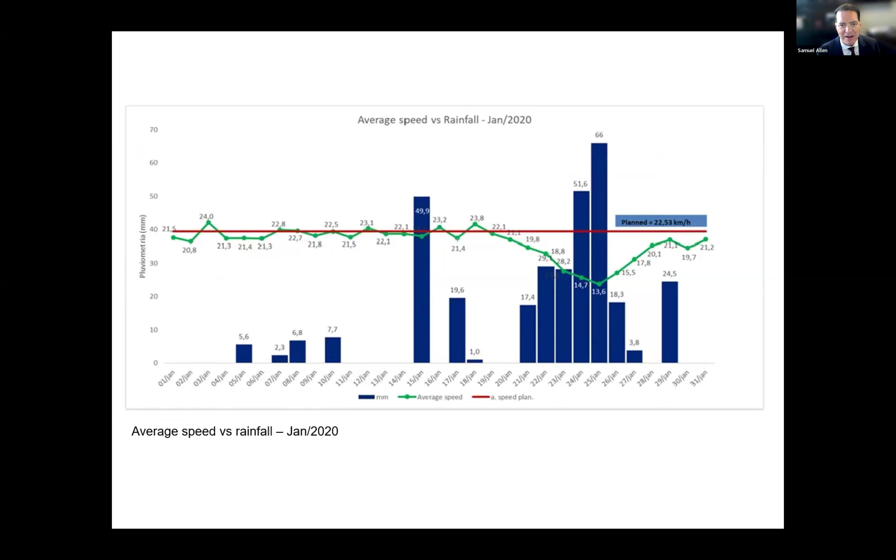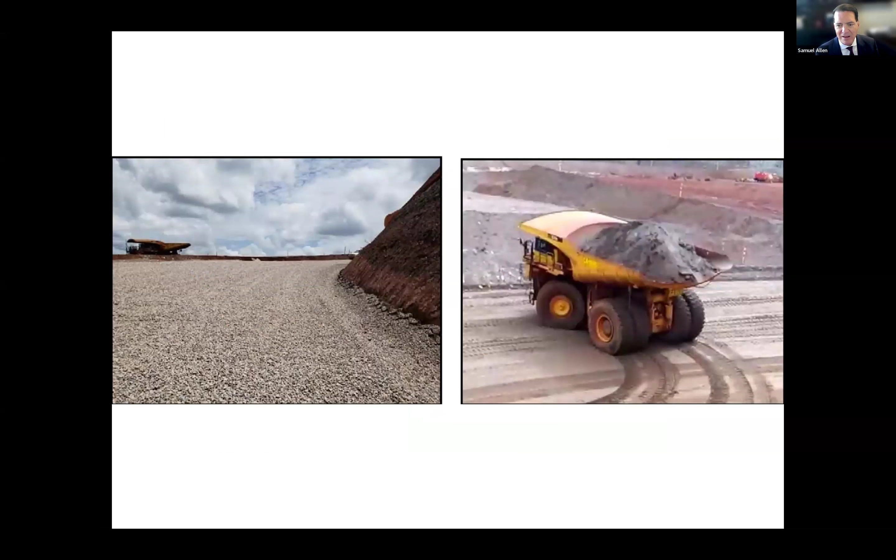So what's the solution? The solution was the use of geogrids to stabilize a sandy gravel cover and a gravel cover and a sandy silt tailings layer. The use of a separator geotextile to keep the integrity of these layers there. So both stabilizing layers of geogrid and a separator geotextile. And the road is competent and it's fixed, even when it's rained, because the gravel doesn't hold any pore water pressure and lets the water out freely. The efficiencies the financiers wanted are achieved, and everyone lived happily ever after as a function of a geosynthetic solution.

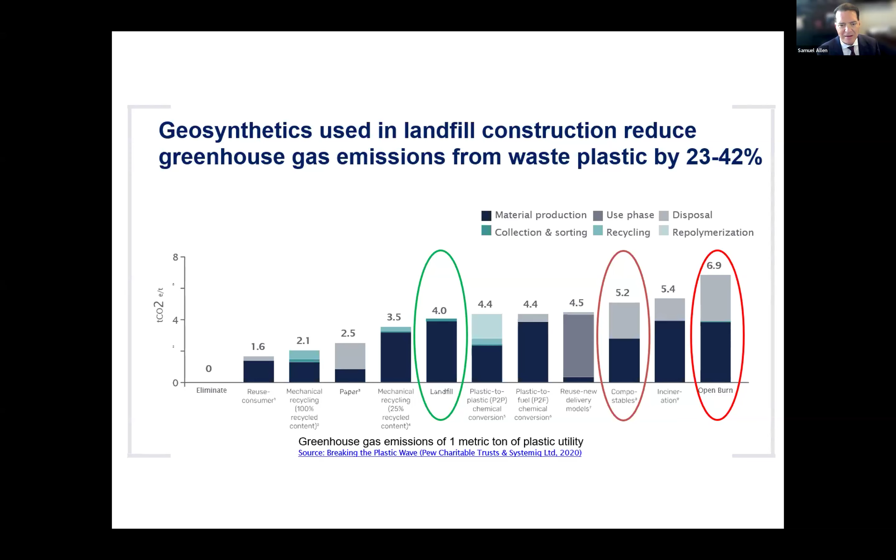And estimates show that landfill disposal results in lower greenhouse gas emissions from plastic waste by 42% compared with open burn, 26% savings compared with incineration, and 23% reduction compared with compostables, right? So again, there's all kinds of ways to slice this carbon footprint benefit story.

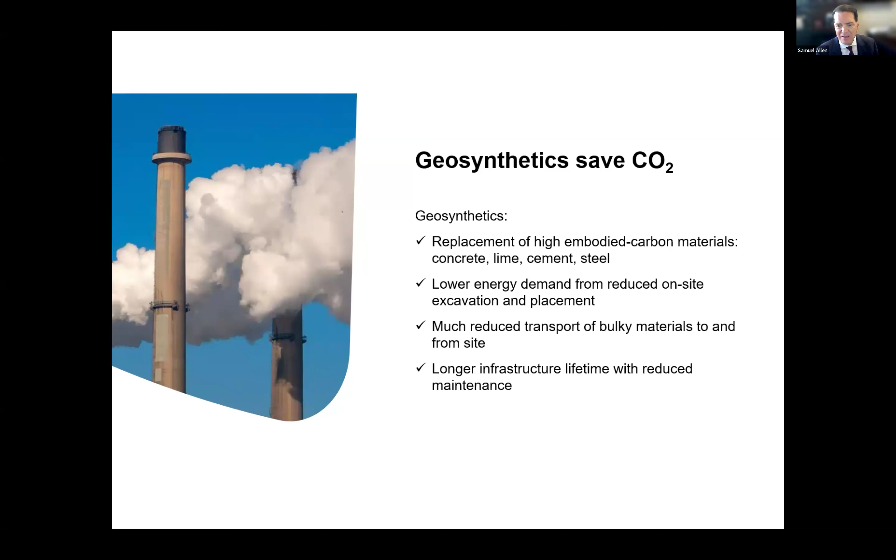If the cement industry were a country, it would be the third highest emitter of carbon dioxide globally, from the manufacture of cement, with 1.6 billion metric tons of carbon dioxide in 2022, right? In the US, the cement industry also emits over 500,000 tons per year of harmful sulfur dioxide, nitrogen oxide, carbon monoxide. Use of geosynthetics greatly reduces carbon emissions and energy use in the following ways, right? So this is very important.

In regions prone to hurricanes, it's especially important to have robust access roads along power transmission lines to allow quick and safe repair, right? To restore power to communities that might otherwise be without electricity for days or weeks. You hear stories about that these days, right? Where an island is without electricity for weeks because of access to these power lines, right?

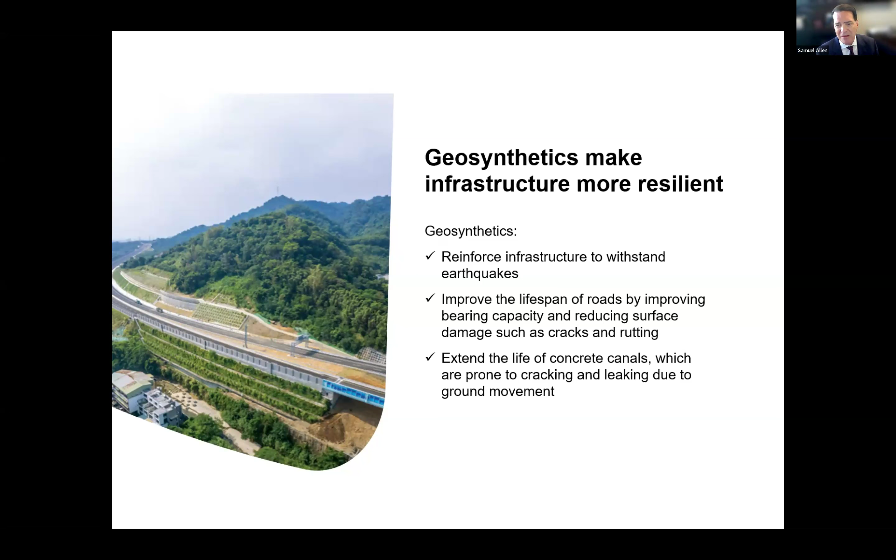Ground movement is a major cause of cracking in concrete lined canals, leading to significant water loss. Geomembrane barriers can also prevent this, a composite lining system in that canal. So we save natural resources. We've talked about that, right?

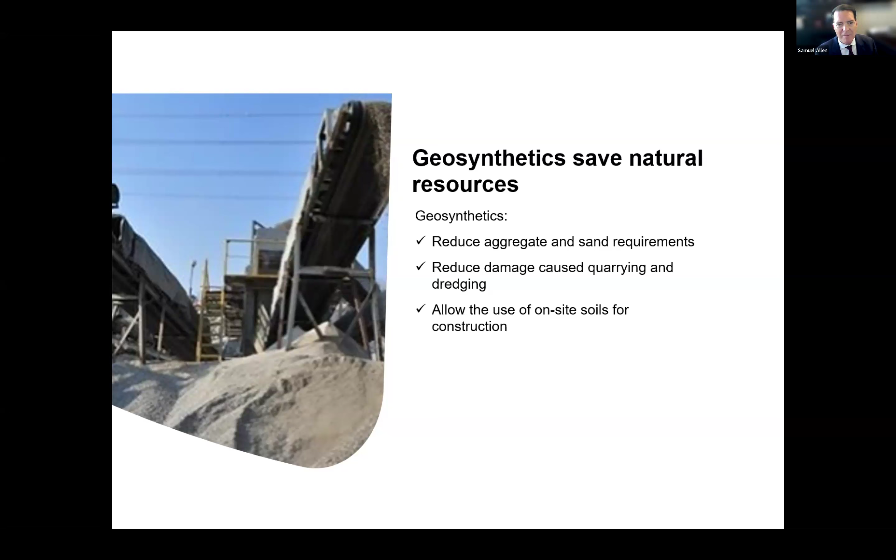Construction aggregate consumes a mass equivalent of about 4,400 Empire State Buildings in a single year in the United States alone. Geosynthetics replace significant quantities of high quality aggregate. Use of aggregates can be highly problematic in terms of energy and wider environmental considerations. And depending on geology and planning restrictions, suitable construction aggregates are unlikely to be available immediately adjacent to construction sites. So geosynthetics play a very beneficial role with all of these challenges.

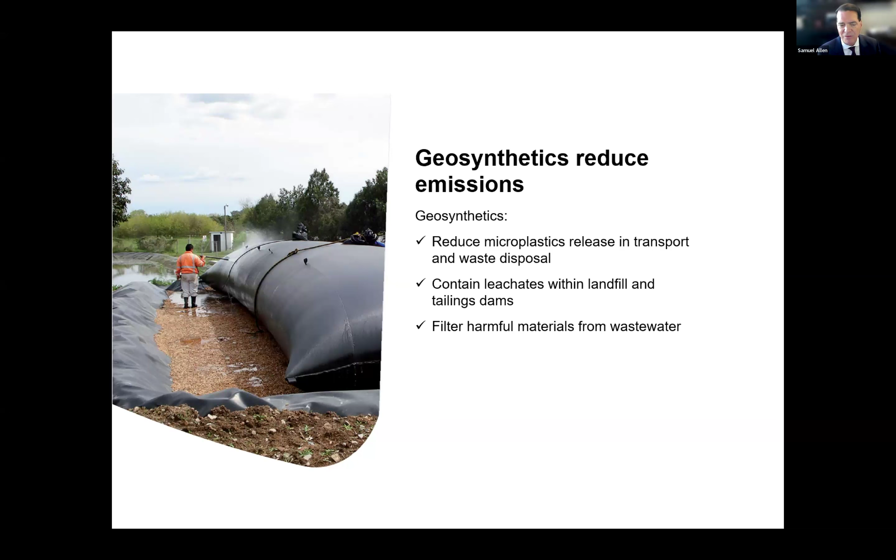So geosynthetics are used to line tailings dams, to store toxins such as heavy metals. They are used in mining as barriers to prevent these toxins entering rivers and groundwater. In landfills, we just talked about landfills, geomembranes are used to line the landfill to prevent toxic seepage.

So I'm running out of time here, and I want to leave a little time for questions and answers. But let me just say, geosynthetics are compelling. I would highly encourage you to get involved, to learn more about geosynthetics, pick up the handbook.